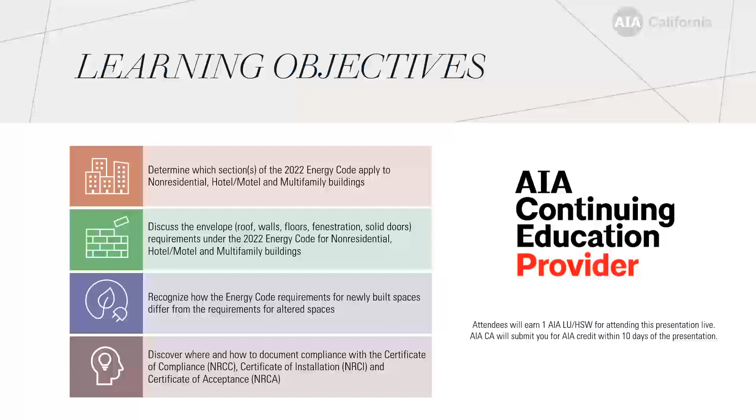Today's webinar, which will focus on requirements in California's 2022 Energy Code for non-residential, hotel, motel, and multifamily envelope features, is brought to you by Energy Code ACE. It qualifies for one HSW learning unit, and we will submit those units for you after you finish in full.

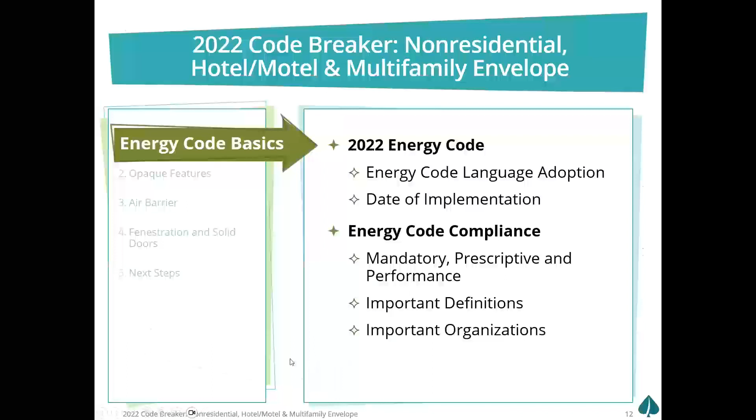Now, basics. I'm hoping all of you know we're in a 2022 building code cycle.

And this goes into effect for projects that apply for permit as of January 1st of this year. If you applied for permit last year, you're subject to the 2019 Energy Code. If you applied for permit as of January, the 2022 Energy Code. It's not based on when you're approved. It's not based on when you start construction. It's all about that application date.

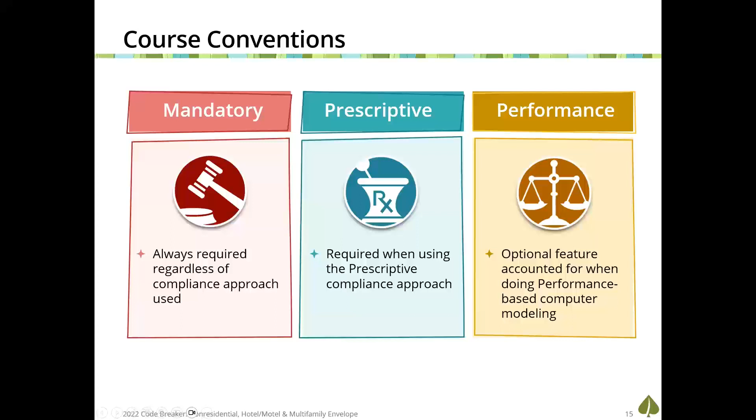Here at Energy Code ACE, we use these 3 symbols and color schemes throughout all of our resources and classes to help identify what is a mandatory requirement versus a prescriptive requirement, or a prescriptive compliance approach versus the performance compliance approach that can be utilized to show compliance.

Now, what are these mandatory measures? Mandatory measures are the first building block, and these are measures that were found to be cost effective for all scopes of work. And that's new construction, the least expensive time to integrate energy efficiency, additions and alterations. Alterations are the most expensive time to integrate energy efficiency measures.

And every energy code requirement, with the exception of indoor air quality, has to show compliance to a cost effectiveness evaluation, of which that particular building feature will pay for itself over its lifetime with energy savings for it to become an energy code requirement. Now, built on top of mandatory measures are our prescriptive measures, which is also a compliance approach.

Now, prescriptive measures are based on climate zone. It's based on scope of work. We might not have the same prescriptive requirements for all building types, for all scopes of work, for all climate zones. We need to really understand what is your project, where is your project, and what is the scope of your project.

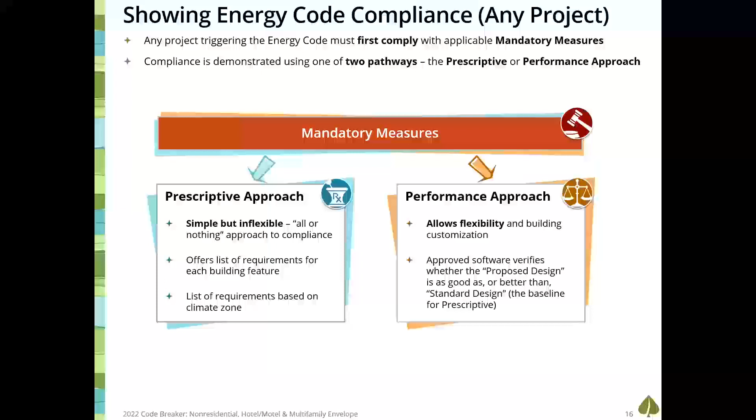You can use the performance approach to get flexibility of prescriptive measures only. Now, you can trade down to as bad as mandatory minimums, but you have to have equal energy savings that offsets that penalty to be able to have a compliance document that says building complies. Now, we're going to talk a little bit about the different ways we can show compliance for just the envelope.

Now, we have a new series of forms in this code cycle. We have our non-residential forms that start with NR that apply for non-residential buildings, hotel motel buildings and high-rise multifamily buildings. Those are high-rise buildings that are 4 habitable stories or more. LM is the brand new series of forms introduced in this code cycle, which stands for low-rise multifamily. So the LM forms would only be used for a multifamily building that's 3 habitable stories or less.

LM forms typically have to be registered with a HERS provider. Now, there are hiccups in that process right now, and the Energy Commission has put out a regulatory advisory indicating that right now we can't register these LM forms. And what they're saying is, when we can register LM forms, the design team is to register them, even if you're in the middle of construction. And we go back and make sure we have these registered documents so that the in-the-field documentation regarding testing and verification is linked up to the registered certificate of compliance form.

So right now we have forms that have a watermark saying cannot be used for compliance. This is not registered. We would have to support, hey, I can use these because of this regulatory advisory. And that is how I go about submitting for compliance to the building department. Now we have a question, are the LM forms in AutoCAD?

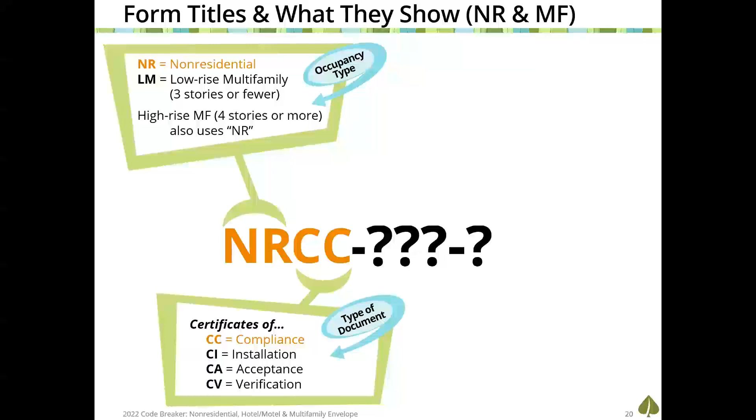Now, there are 2 methods that we can show compliance for the envelope. We can use state certified software via the performance approach. Currently, right now, there are 3 options for non-residential buildings. We have CBECC, which is the state provided software that is free. We have EnergyPro, which is a third party for sale product that also does prescriptive, also does single family, does a lot of things. It's a popular choice. There's also IESVE, which is really unique because it is a 3D modeling tool that can help support the performance approach. So there's choices, and we have to decide which pathway we're going at the beginning of a project.

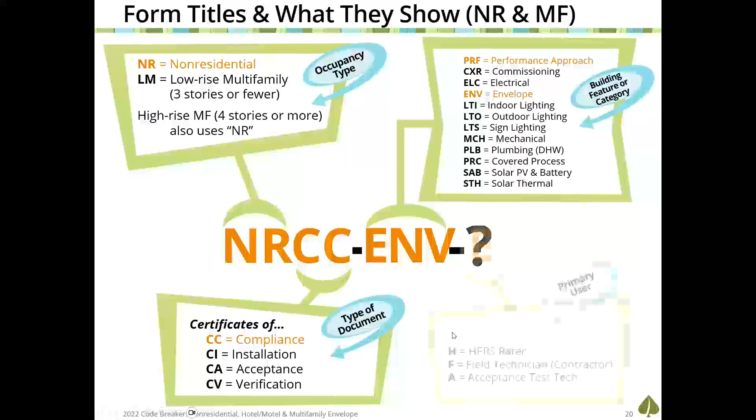Or we can use the prescriptive approach, which is documented with the NRCC ENV form for a high-rise multifamily, non-residential building or hotel motel building, but it would be an LMCC ENV form if it is a low-rise multifamily building. Now, there is a letter at the very end of all the compliance forms, and they help support who's responsible for enforcing the information within that document. E is the authority having jurisdiction, the enforcement agency, the building department. H would be the HERS rater, which is typically associated with the CV forms. F, field technician, that installing contractor, or A, acceptance test technician, which is a certified acceptance test technician for our acceptance testing.

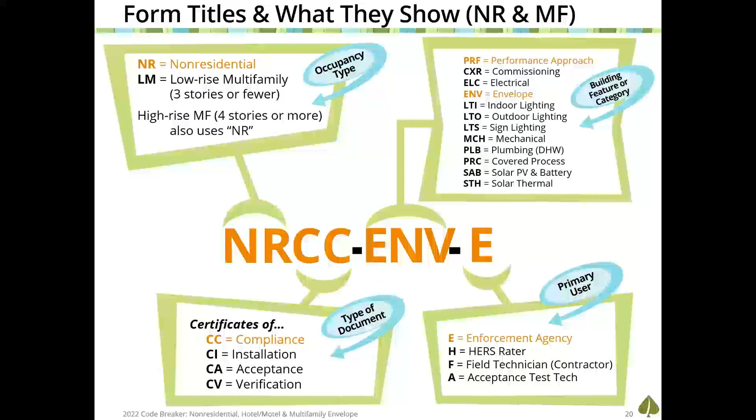Now, I think this is an important conversation for you guys to be aware of, because how are you making sure that the contracts and the requirements required of the contractors is fully being supported with your design documents, specifications, and work orders, so that everyone knows who's doing what, when they should be on site, and how to not be stuck at the end of the day not getting your occupancy permit because all of this process, testing and verification, has not been accomplished before you submit for final occupancy.

Now, the virtual compliance assistant is a free tool available through Energy Code Ace that will help support the certificate of compliance documents. It also has a new process that's been introduced brand new for this code cycle for the certificate of installation forms for the contractor, in which it pre-populates what was promised with the certificate of compliance. Why is that important? Well, the certificate of compliance forms can get overwhelming. How many of you guys go, oh my gosh, my project has 10 pages of sheets just to support the certificate of compliance form for the energy code, and I can't even read most of these? Well, the contractor gets overwhelmed also. The certificate of installation will just show that contractor's scope of work.

And I've been telling people, do this before you start engaging contractors. Do this to help support the bidding process. So like I, as an energy consultant, I am providing these installation forms that are bringing just that scope of work for whoever's doing the envelope, who's doing the windows, who's doing the mechanical systems. So they really know what they should be bidding on and what's expected of them. So it might be something you might want to consider as a design team to help support the contractor down the road. Let's stop talking about contractors now and let's start talking about design.

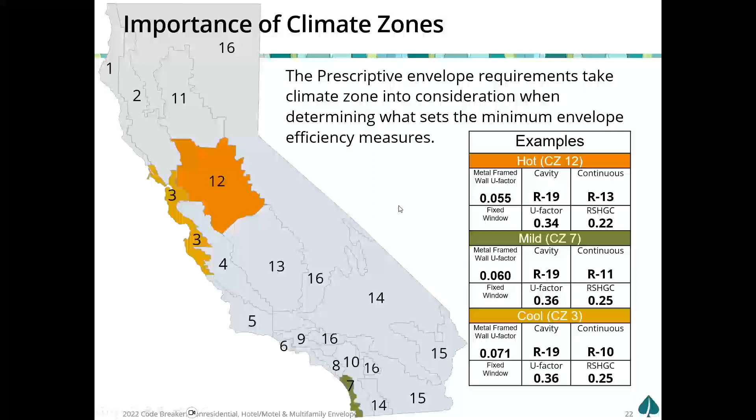And if you find you cannot meet these maximum U-factor requirements of your climate zone for your building type, well, that's when you have to start considering, should we be using the performance approach to get flexibility because of the design parameters and the scope of work that our building owner would like this building to entail.

There are some important definitions when we talk about the envelope, because the envelope requirements, with an exception associated with daylighting, in which we want to bring natural light into large volumes of spaces, whether they're conditioned or unconditioned, everything else in the energy code applies to conditioned spaces only. And I find a lot of people don't understand what is a conditioned space. Well, we look at the conditioned space as the definition in the energy code.

Now, the definition in the energy code of a directly conditioned space is a space that's being provided with wood heating or mechanical heating or cooling systems that exceed 10 BTU per square foot of heating energy, or 5 BTU per square foot of cooling energy. So sometimes I'll have a large warehouse and they're like, Gina, it's a large warehouse and they're packing some boxes over here in the corner. So we're going to do a little bit of spot heating, or it might be mats, it might be a unit heater. Is this warehouse conditioned?

And a lot of times I'll do the math and go, nope, you guys haven't exceeded the 10 BTU per square foot that defines this space as conditioned. So we do not have to meet the envelope requirements of the energy code for this warehouse. But the minute those mechanical systems do exceed these thresholds, that envelope in its entirety will have to meet the energy code requirements. Now, I want to point out the definition for newly conditioned space.

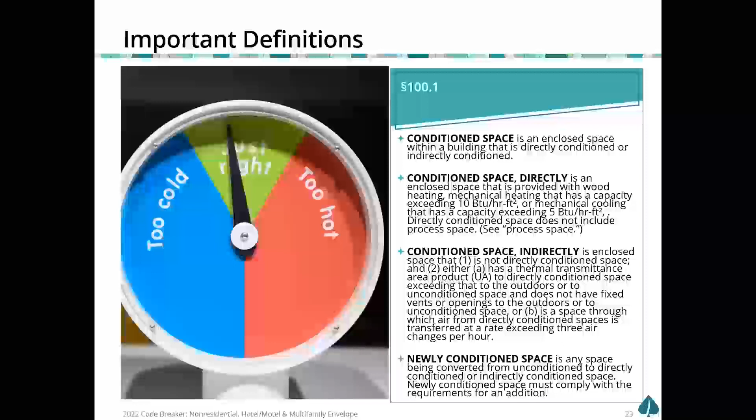It existed previously as an unconditioned space, but now we're converting it to conditioned space. And it is considered an addition by the energy code. And in addition, the envelope features, all of them, even though they were existing, will have to meet current code requirements to show compliance to the energy code.

Now we have exterior partitions and we have demising partitions. Exterior partitions are separating that enclosed space from the great outdoors. Whereas a demising partition, which is probably not the definition you think it is, because the energy code likes to do their very own definitions, a demising partition is separating an enclosed conditioned space from an enclosed unconditioned space. So think about an enclosed parking garage that is underneath an office building. That floor is now a demising partition because above the floor is conditioned office and below the floor is unconditioned garage.

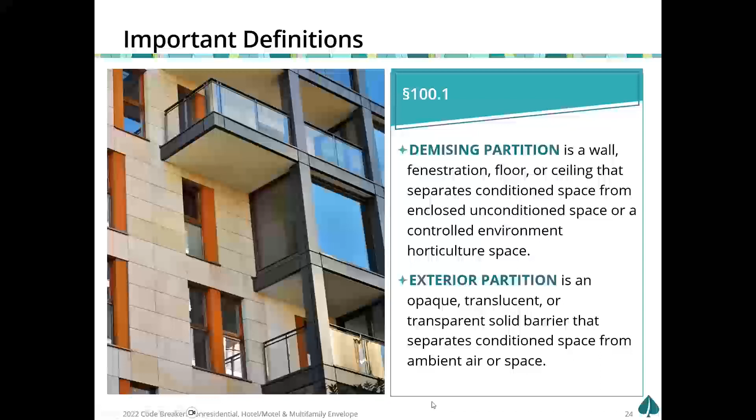Both of these partition types will have energy code requirements, but they'll differ because that demising partition is not subject to as much heat transfer as our exterior partition requirements. Hence, typically the requirements of the energy code are less stringent than they are for an exterior assembly.

Now we need to talk about scope of work. Is it new construction? Is it an addition, or what we like to call newly conditioned, which is considered an addition? Or is it an alteration, which has code requirements of the energy code? Or is it a repair? Repairs do not have energy code requirements, but repairs cannot increase the pre-existing energy consumption of that particular component, nor can it have alteration requirements of the energy code for it to be considered a repair.

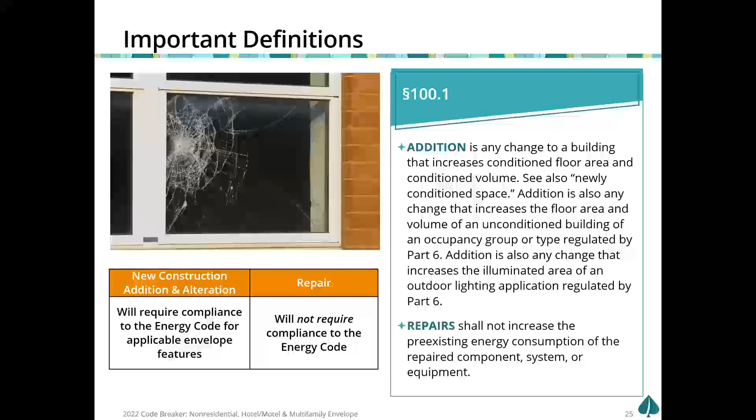And it's not easy to navigate the difference between repair and alteration, and I strongly recommend, if you don't have an energy consultant that you like to reach out to see, hey, did I trigger the energy code? You might want to send that question in to Energy Code Ace or to the CEC hotline to get a really good feel if your scope of work triggers the energy code.

Now, there are various organizations we need to be aware of when we're talking about the energy code, such as Cool Roof Rating Council. Oops, which is spelled wrong.

Cool Roof Rating Council certifies a cool roof roofing product, and we have cool roof requirements, or what we like to call rated roofing material requirements, for all new construction, additions, and for many alterations for most non-residential projects. We don't always for single family, but we do for non-residential.

The Department of Consumer Affairs certifies products as being insulation and radiant barriers. So sometimes I'll have a client going, Gina, we're going to be using DensShield on our walls, and then we have insulation between the framing. I have continuous rigid insulation because I'm using DensShield. Well, DensShield is not a rated insulation product by the Department of Consumer Affairs, hence cannot meet the requirements of continuous rigid insulation of the Energy Code because it's not certified as an insulation product.

Now, I find the certified list of rated insulation products can be elusively difficult to find. So I strongly recommend all of you grab this hyperlink that I have here and save it because it's not easy to find. And in there, you'll see there's an Excel sheet download that supports the current certified products. So you're going to have to keep coming back to see if any new products have been added over time.

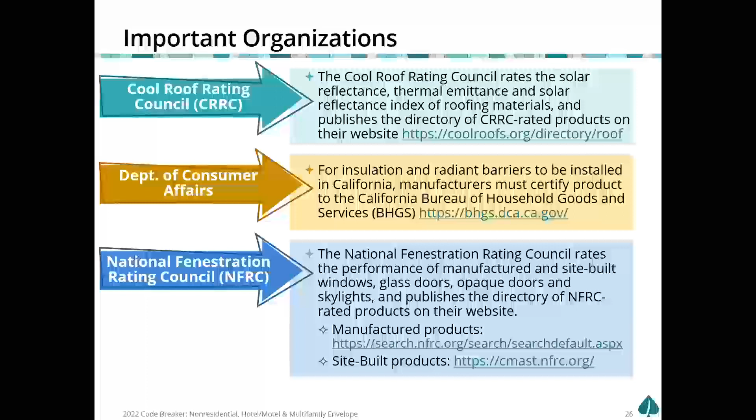National Fenestration Rating Council certifies the energy efficiency of window fenestration features, whether it's a window, a glass door, a skylight. And you'll see that there have been changes for this 2022 code cycle that's really pushing towards all window products being NFRC rated or certified. And there's very few exceptions to having to have an NFRC certification.

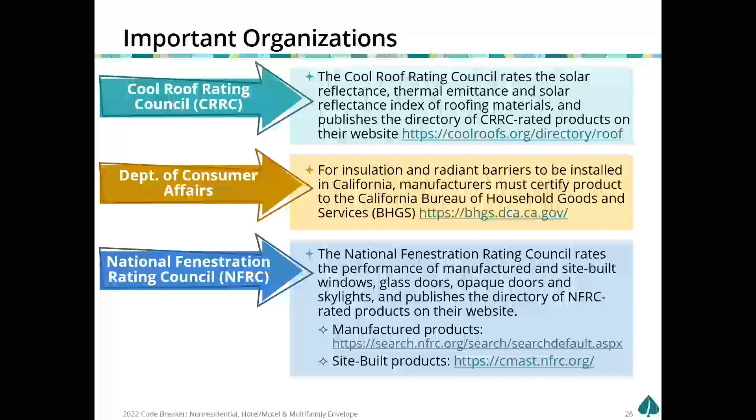I'm finding this is causing havoc out in the field where contractors are not up to speed on this. And we really need you, the architects, to be very clear in your specifications and your window schedules about what the certification requirements are associated with the window products of your projects.

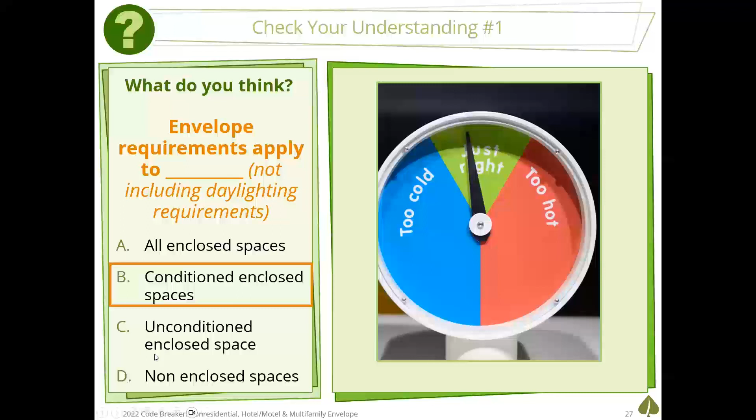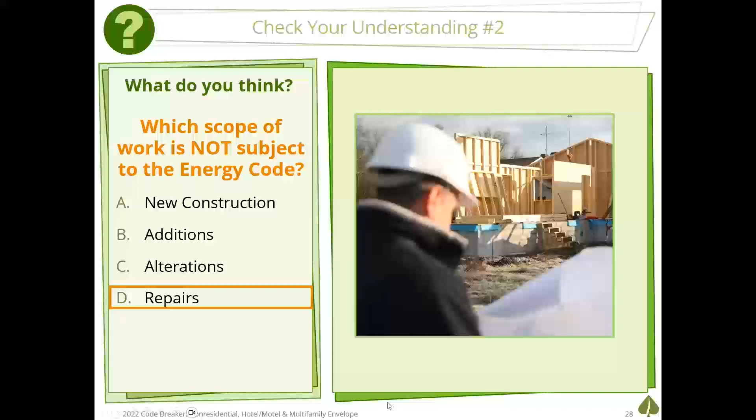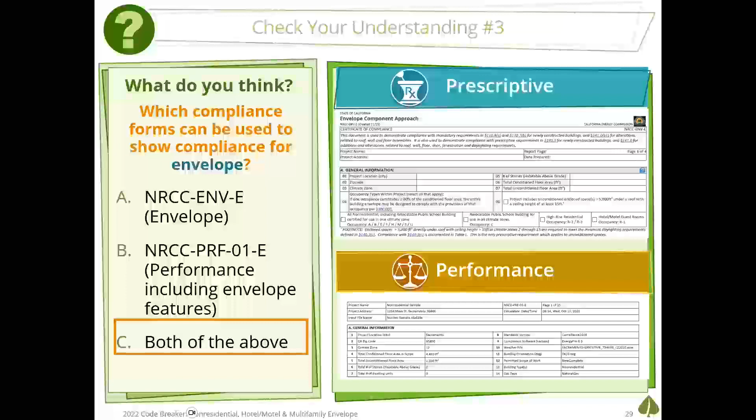If you need wiggle room for your envelope, you can use the performance approach for just the envelope. You can also add mechanical systems. You can also add electrical systems, PV, battery, etc., but you don't have to. What's great about non-residential hotel motel compliance currently is that you have that flexibility. Right now for multifamily, we don't currently have that flexibility, and I'm hoping that will change in our next couple versions of software.

Okay, let's talk about opaque features. These are features I cannot see through. Let's start with the roof. But before we get there, some important definitions. U factor versus R value. Now, the thing that's important here is that the R value is only something that's going to be utilized per the materials that are approved by the Energy Commission as materials that can build up that R value, knowing that insulation has to be insulation that's certified by the Department of Consumer Affairs.

Now, U factor is the inverse of R value, considering all of the assembly layers associated with each of our assemblies. Now, there are some restrictions there also per the Energy Code of what we can utilize that determines the U factor.

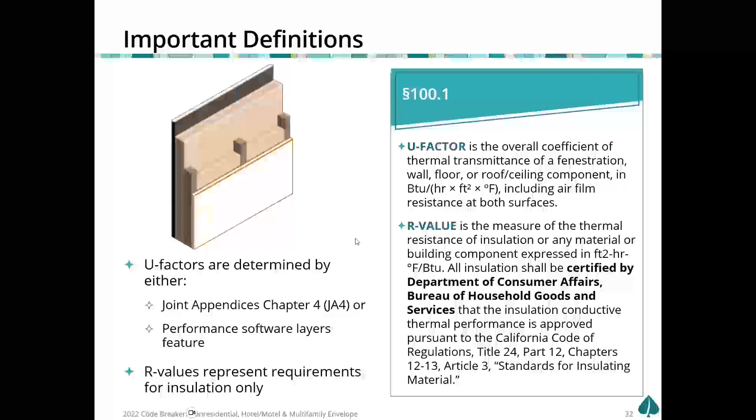When we talk non-residential, hotel, motel, and multifamily compliance, we are mostly going to be talking about U-factor, because we are going to be looking at what is your framing configuration, what are your layers of insulation, and where are those layers of insulation? What are other features that might be associated with your assembly, like it's a double wall assembly, or it's a staggered stud assembly, things I'm going to take into consideration that isn't all about just the R-value of the insulation products associated with the assembly.

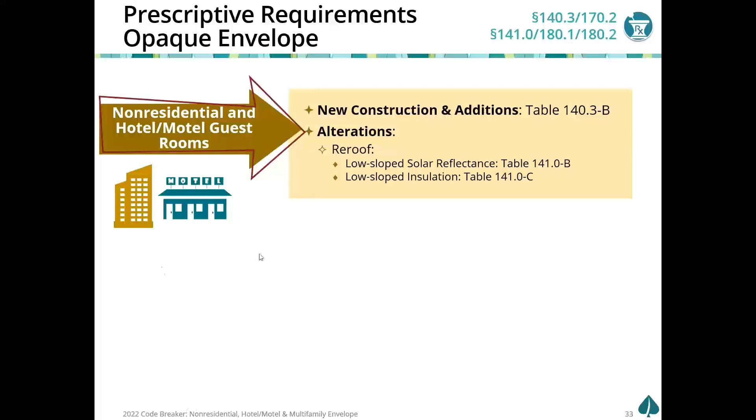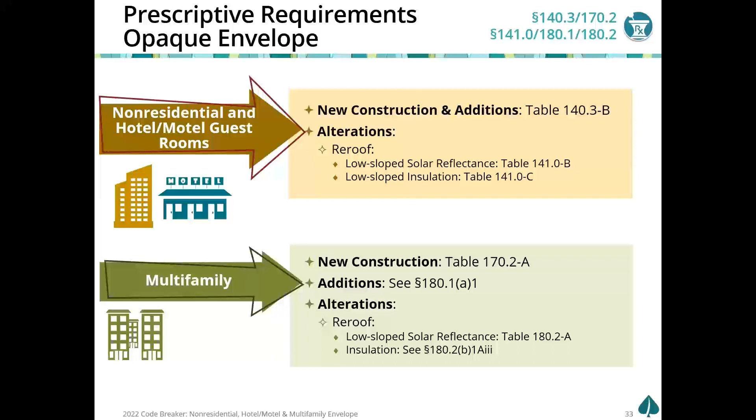Now, when I talk about non-residential and hotel motel guest rooms, I'm going to go into the code sections of the code book of subsection 140.3 specifically. Then there's another section that speaks to just the alteration rules associated for envelope, associated with our non-residential and hotel motel rooms. What is brand spanking new for this code cycle is that they created 3 new subchapters just for multifamily occupancies. And we would go to subchapter 170 for the new construction rules, and then we would go to the 180s for how the rules change for additions and alterations to multifamily buildings.

Let's start with the roof. I like to start at the top of the building and work my way down. Now, one of the things I want to tell you guys is that there are some aggressive alteration changes of the Energy Code associated with re-roofing in this 2022 code cycle. And it is throwing roofing contractors for a loop. So you might have to do more to support what's required of the contractor when we're talking about a project scope that includes anything to do with altering the roof.

Now, we need to understand some definitions when we talk about alterations to the roof. So here's this brand new fact sheet that we just came out with, and here it's providing to us some important definitions that we need to know about. And we need to know the definition of roof recoat versus roof recover versus roof replacement, because we're going to see that the requirements for the roof will change for a roof recoat versus what's going to be required for a roof recover and a roof replacement.

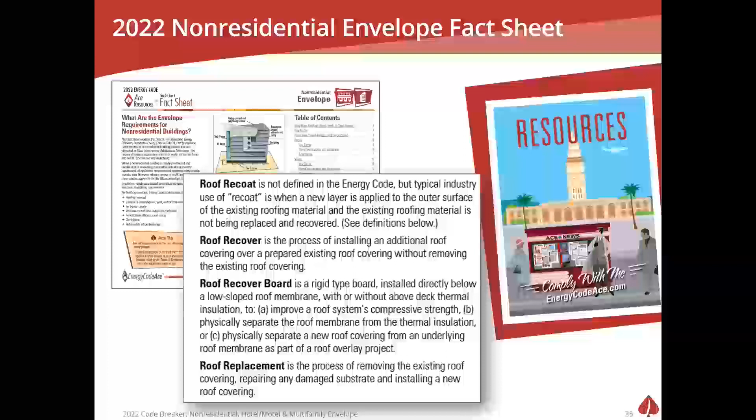I'm finding that almost everyone agrees with what the definition is for roof replacement, but there is a lot of stuff going on out there and people trying to determine scopes of work fitting into roof recoat versus roof recover. It's been so fun to be part of this process.

So let's talk about our cool roof requirements for new construction. So we need to know the slope of the roof. A low sloped roof, that's a roof that has a pitch of 2 in 12 or less. You will see that all non-residential buildings of all climate zones are going to have cool roof requirements. If it is a hotel motel building, you'll see that only the guest room area of that hotel motel building in some climate zones have cool roof requirements.

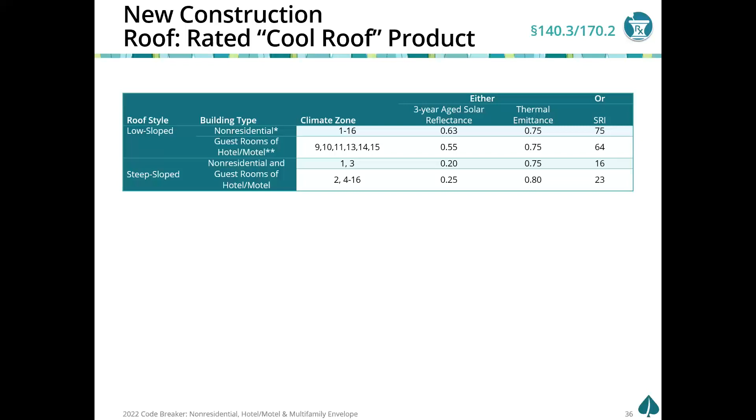Who's going to do cool roof over only parts of the building? That's never going to happen. This is one of those things that they're talking about changing for the 2025 code cycle by not defining hotel motel by just where the guest rooms are, but that entire occupancy. Now, the minute I have a steep sloped roof that's a pitch greater than 2 in 12, you'll see that both non-residential and guest rooms have the same requirements, which is very much dependent upon climate zone. Climate zone does determine whether you have to consider cool roof or not for a steep sloped project.

So I wanted to give you guys a feel of what does that 0.63 aged solar reflectance mean to me. So I went into the Cool Roof Rating Council database, and I love this database because I can sort by color. I can sort by product type. I can sort by aged solar reflectance. And I'm trying to hide the innocent here because we at Energy Code Ace cannot promote one product over another. But I want to show you that there's lots of choices.

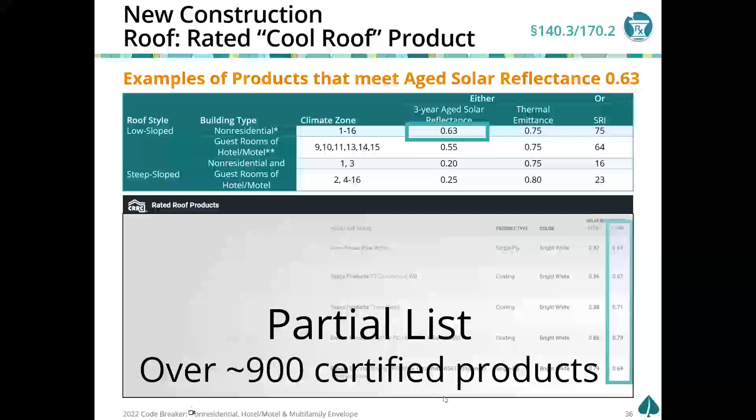And what I find is almost always you guys are already specifying a cool roof, even though you don't know it. And it's usually, if it's white, a pretty gosh darn good product. And in the performance approach, I can take advantage of what you wanted to use anyway, because it exceeds these values. So this seems like a small discussion, but it can make a big impact to your compliance margin in the performance approach. Now, there are some exceptions to cool roof, such as in certain climate zones.

If you're giving me a certain U factor, well, then you've already saved the planet, and I'm not going to make you have to do cool roof. If you have a heavyweight roof, such as an occupied roof, we're not going to make you have to do cool roof because the two don't really coincide with each other.

If the roof is an integrated PV panel, not a PV panel on top of the roof, but the roof itself, think Tesla roof systems, is the PV system, that PV system does not have to meet the cool roof requirements. And there is an ability to get trade-offs for the specific cool roof requirements by adding more insulation to the roof. Why might you want to go there?

Sometimes we have glare requirements in certain cities that if you're surrounded by buildings that are higher than your roof, we want to prevent the glare into those spaces. And so we don't want a bright white roof. Maybe we have to do a tan roof. You also might have requirements around airports or observatories that might talk about the glare requirements.

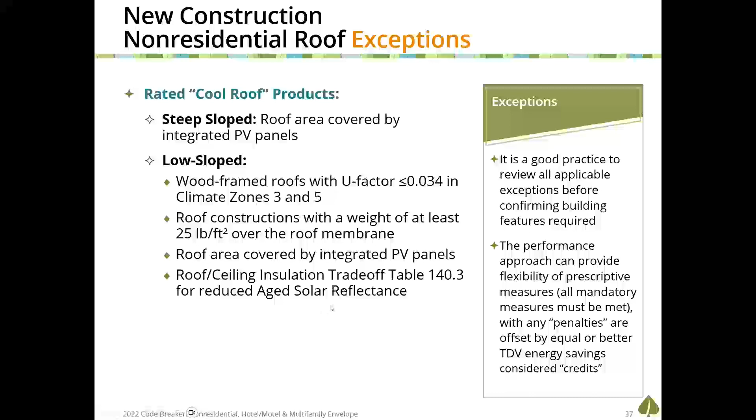I always like to say when it comes to exceptions, read them first. Start with the exceptions, see if you even have to read further about what the energy code requirements are to determine what your scope of work is going to have to do to support the energy code requirements.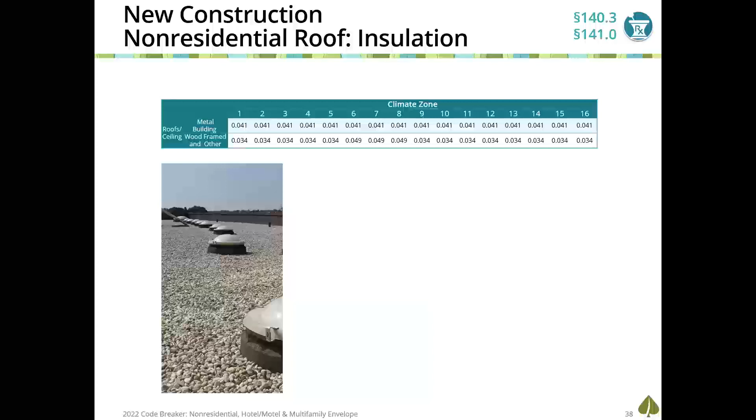Now, roof insulation is a thing, just like we have wall insulation and floor insulation. It does differ on building type. Here you'll see metal building. Metal building is a prefab metal building. It's metal panels. It's not the same as a metal framed building. If we have a metal framed building, a wood framed building, a SIPS building, I don't care, any other type of building, that's when we go to the wood framed and other.

And I just thought I'd give you guys an example of the most common U factor we see here for most climate zones at the 0.034. One example is I have 4 inches of concrete up there on my span deck, plus I'm going to have 5 inches of R5 polystyrene. If I want to use polyisocyanurate, I'm going to have maybe only 3.5 inches. If I don't have the concrete, well, then I might have to do more insulation because I don't have the mass. I have a wood framed roof. Well, this is going to then represent R38 or R30.

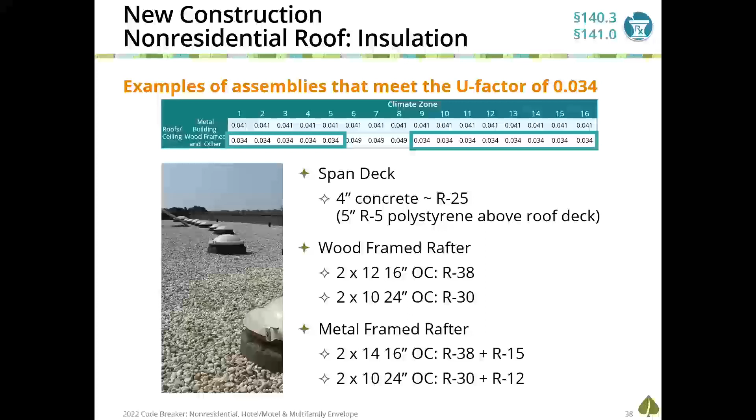But if I have a metal framed roof, now you're going to start seeing we have layers of insulation. I still want that R38, but I'm also going to have to provide continuous insulation that equals R15 in this example, or R12 if I'm using 2x10s, 24 inches on center. I don't have as much framing interruption, so I can go down in insulation to help to then still meet that overarching U factor of 0.034.

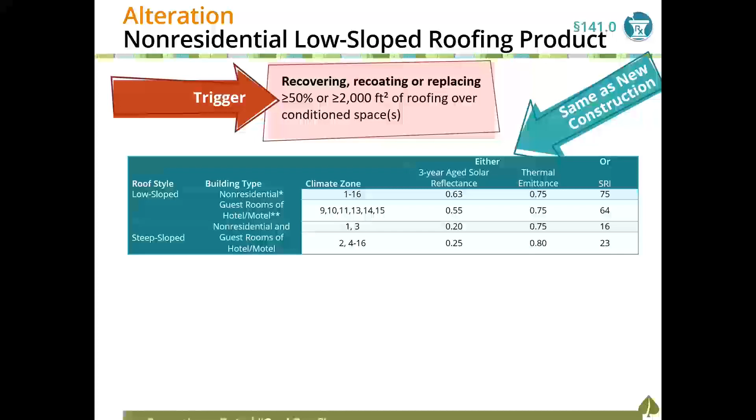Now, when we're talking about re-roofing, if you're re-roofing 50% or more of the roof, or 2,000 square feet or more, whichever comes first, and it's a recover, a recoat, or a replacement, you're going to trigger the same exact requirements we just talked about for new construction, and the same exact exceptions for alterations as we saw for new construction. What's different is regarding the roof insulation requirements. And I'm just concentrating on low sloped roofs or flat roofs right now.

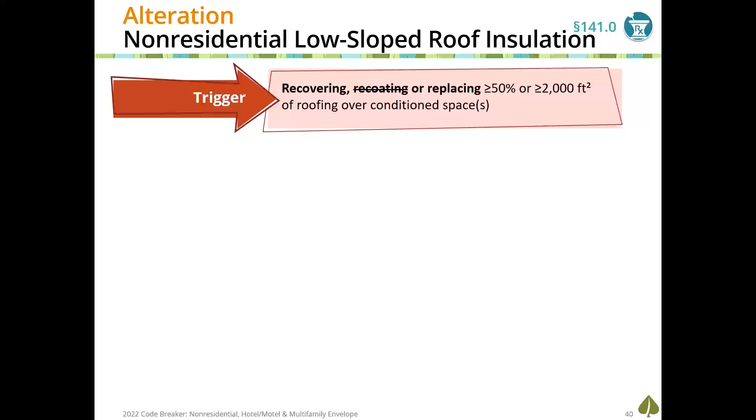If you recover or replace the roof 50% or more, 2,000 or more, whichever comes first, we have some new aggressive insulation requirements, which in most climate zones is going to be R23 continuous insulation. Now you do have a U factor, but they did say, hey, yeah, we'll let you think about the U factor and how much insulation might be below the roof deck. But we want at least R10 or more insulation to be added above the roof deck.

This is all about trying to deal with condensation issues, concerns, et cetera, in which having that insulation before we get into the warm area of the building, building science says, hey, insulate on the outside before going to the inside. And that's going to help prevent some of the moisture condensation concerns many people in the industry have when we talk about cool roof products.

Got to tell you, roofers are struggling with this, because what happens when you have parapets that have curbs that don't allow for an additional 2 inches of insulation? What happens for that threshold, for that entry from the exit of the stairs to the roof? What happens to the various pieces of mechanical equipment that are on there?

What happens to your PV systems that are on stanchions up there on the roof? How can we do all of this? Now, there are some exceptions, but they're not as much as people would love to have, such as if you're recovering and you add new R10 insulation, you do get some exceptions. If you're not lifting the mechanical equipment, you do have an exception, but there's no exceptions for the parapets. There's no exceptions for the PV panels. There's a lot of things we don't have exceptions to.

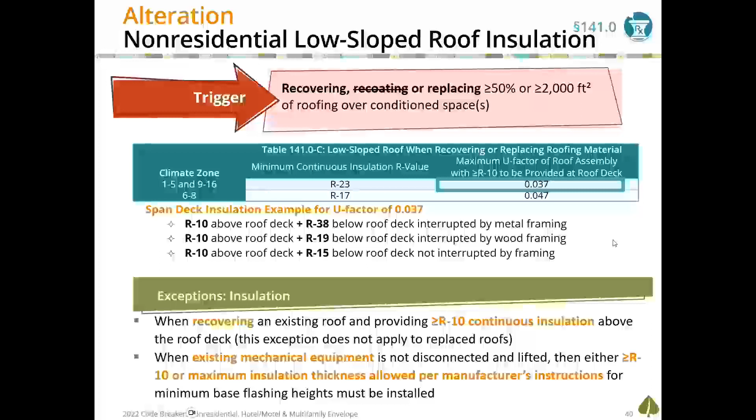Becky's asking, I want to confirm wood frame roofs do not require continuous insulation. That one example I gave you, Becky, would not require continuous insulation. I gave you one example of how we can meet the U factor. That is not representative of all assembly types. So that was an example only.

Example. I'm going to say that over and over again, because you're going to be like, Gina said, and we never want it to get back to Gina that someone said Gina said. It's happened.

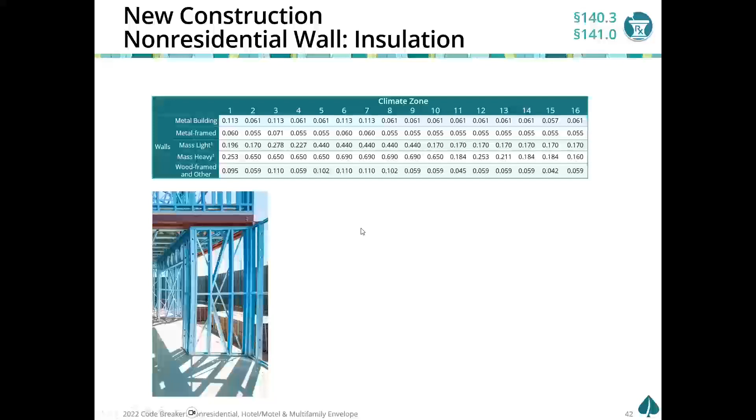Walls. Okay, so new construction based on climate zone and wall type. Here's that metal building again, our metal framed wall versus our light mass walls, our heavy mass walls. We have definitions that help us understand whether it's heavy mass or light mass. Wood framed and other, that's that category that everything else I didn't mention is going to go into. And let's take an example. I find most non-residential projects use metal framing, and we have a 0.055.

Here's some examples. Now you'll see here with metal framing for my walls, it's really not possible at all to get this U factor without having an additional layer of continuous insulation on the wall. It could be on the outside of the wall. It could be on the inside face of the wall. It can be within the wall because it's a staggered stud wall. It could be a SIPS, well, it wouldn't be SIPS because then it wouldn't be metal framed, but there's many ways you guys can go about doing this.

Now, let's talk a moment about Z-clips. Z-clips come in different flavors. You have metal Z-clips, you have fiberglass, you have isolated metal Z-clips. If it is a pure metal Z-clip and it is spaced 24 inches on center or closer, those Z-clips have to be modeled as metal framing interruption. And all of a sudden, all this work, expense, and everything we did to get this additional layer of continuous insulation is negated. So we really have to think about what are you using for Z-clips and what is the spacing and what does that do to your overall compliance for your wall assembly.

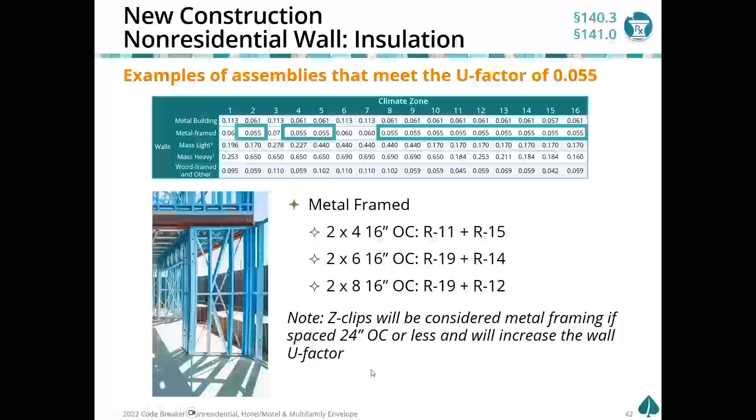Alterations for walls. So if you are making an existing wall accessible, you're taking the outside face off, you're taking the inside face off, I don't care, you're rebuilding a wall in the same exact location, that is an altered wall. And now you just have to meet the mandatory requirements of the energy code. Now I start talking R value. If you have a metal framed wall, fill it with R13, walk away, call it done. If you have a wood framed wall, fill it with R11, walk away, call it done.

Now, if it's a demising wall, that's when we have to start talking, because demising walls, if they're metal framed, remember that demising wall is separating enclosed unconditioned from enclosed conditioned. Metal framed has a U factor of 0.151. You cannot get 0.151 with a 4-inch metal wall, a 6-inch metal wall, with just R11, R13, R19, R21. You can't get the 0.151 unless you also have either continuous insulation or it's a fire rated wall in which you have 2 layers of 5/8 gyp on both sides of the wall. So there's a lot of discussion that has to happen regarding what's happening to demising walls.

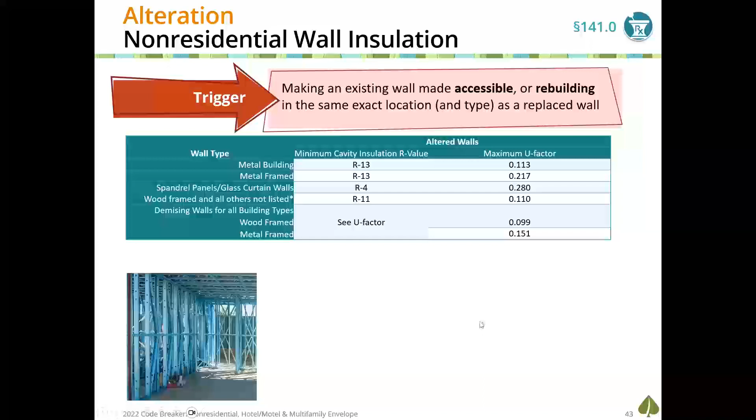And I forgot I had that fun little information on that slide. So I have a question for you guys. An alteration trigger for complying to the roofing requirements is going to include which scope of work? Which of these or all of the above is going to trigger cool roof requirements for all climate zones for non-residential buildings, for low sloped roofs? Excellent, everyone. That is D, all of the above.

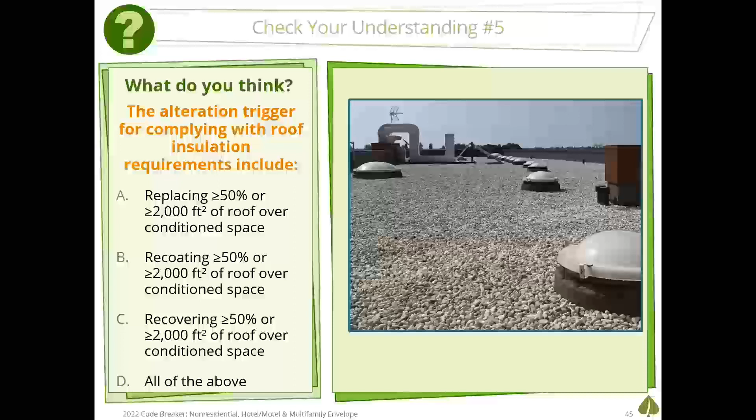Excellent. Now, what is the trigger for low sloped roofs when we talk about having to insulate that altered roof? What is the trigger for having to insulate that altered roof?

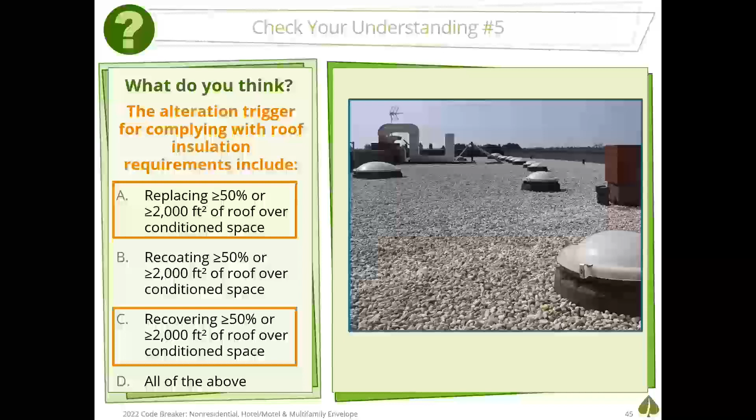With me saying D is not the right answer. A is right, and I want you guys to give me one more letter. A and what else is a trigger for the insulation requirements of this energy code? Excellent, everyone. That's going to be A and C. Recoat does not have to meet these requirements, which is why everyone right now wants to call their re-roof project a recoat. And they're almost always wrong.

Let's talk about some of the new air barrier requirements of the energy code. And you'll see I still have fenestration to talk about, which is a beefy topic. And now you know why I'm talking so fast. I'm hoping you guys are getting this. I know you guys want the handout, and I'm hoping you'll take our non-residential architect class, in which we talk a lot slower and we do exercises to apply these code requirements. Gina can talk slower. Air barrier.

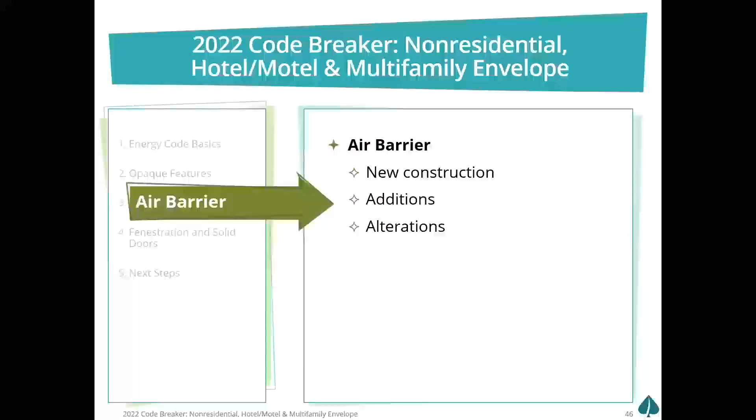Now, we had air barrier requirements in the 2019 code, but only for new construction and only for certain climate zones. And it was very limited in terms of what was required. They beefed it up in this code cycle, and it needs you, the architect. This is going to be required for all non-residential buildings in all climate zones, and for hotel motel buildings, except for climate zone 7. So non-residential, multifamily, multifamily does not have any air barrier requirements. Non-residential in all climate zones, hotel motel, all climate zones except for climate zone 7.

The design documents, there's new requirements for you guys. The design documents have to include the air barrier boundary, which is the conditioned envelope. So if I have a mix of unconditioned spaces, and there's kind of what I like to call innies and outies going on, you need to help define where is the air barrier. And now that we've defined the air barrier, we need to make sure that all your interconnections and penetrations support the air barrier. What is the air barrier? Where is it? How are we caulking and sealing for windows and penetrations and transitions and interconnected walls, et cetera, to maintain a continuous air barrier?

And then you're to provide the total square footage of all sides of the air barrier within the design documents. Now, they didn't give you any guidance on what this associated square footage looks like. So we're in a whole new world here. What does that look like? What are examples of that? Currently, Energy Code ACE is working with AIA to help produce some standard details that help support some of these requirements that we're talking about. So I'm hoping you'll look forward to that on our Energy Code ACE website with what's being done in conjunction with AIA.

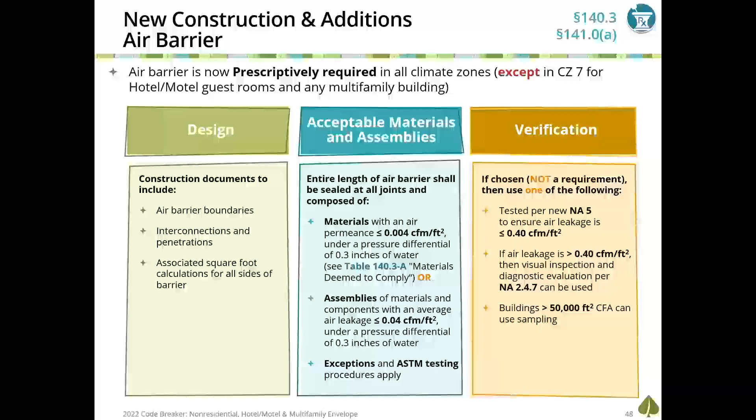Chipboard and plywood of certain thicknesses, not all chipboard, not all plywood. I think it's 1/2-inch plywood. I'd have to go to the table to get exactly what the thicknesses are. But yes, chipboard and plywood are on that approved list as an air barrier product, dependent upon depth of the product. You can volunteer to have that blower door testing because you want to. I have yet to have anyone want to do that, but it's a choice.

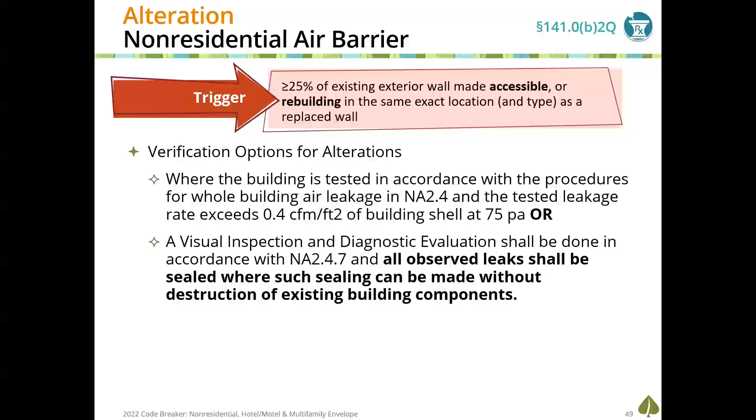Now, alterations to our non-residential buildings and our hotel motel buildings, except for climate zone 7, we have new air barrier requirements. If 25% or more of the exterior walls are being made accessible, or you're rebuilding in the same exact spot, then we're going to do our blower door testing. We're going to do some things. We are going to make sure you're using that air barrier product. There's things we have to consider for alterations to existing buildings to maintain the air barrier, the trigger being 25% or more of the exterior wall square footage is being made accessible or being rebuilt.

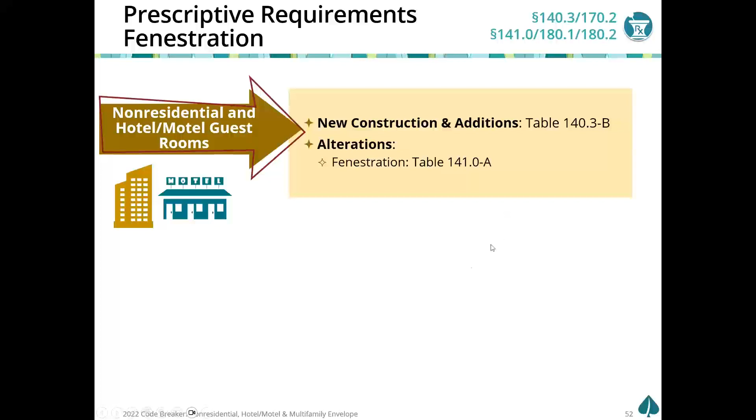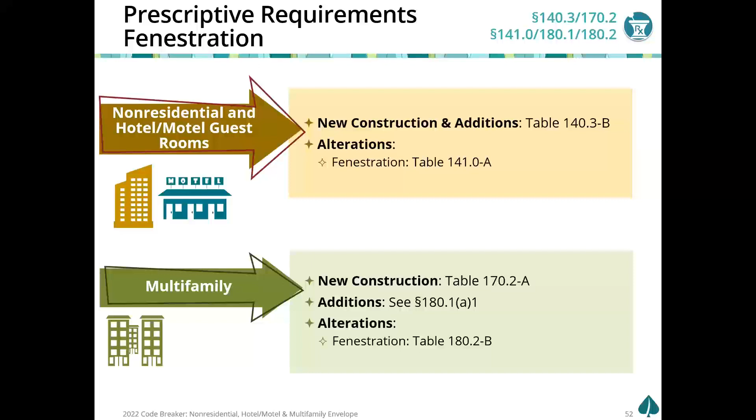Fenestration and solid doors. Okay, I have 13 minutes. So we'll see that non-residential and hotel motel buildings are still in section 140.3, and for alterations section 141. But for multifamily, remember, we have whole new chapters. We're going to go to 170 for fenestration also, along with our opaque assemblies, and the 180 sections for additions and alterations.

We have 3 different definitions of fenestration products. We have manufactured products, we have site-built products, and we have field fabricated products. Manufactured products are products that are available to everyone from a manufacturer. You can go to Home Depot and buy them, right? They weren't made special for your design at that site location. When it is a manufactured product, it is to be NFRC rated, or you can use default values.

Now, I got to tell you, default values cannot be used in the prescriptive approach. Default values represent the worst window known to mankind. And it's really difficult to show compliance in the performance calculation if you have a lot of default windows. We can almost always get it to work when we have maybe a fire rated assembly, some certain doors that have glazing within the door, certain features. But the minute we start having over a certain amount of default windows, compliance is very, very difficult to achieve.

So it means you guys really need to be up to speed on what products are NFRC rated when you're doing manufactured products, which is typically our punched windows. Site-built products are more common for custom skylights, and storefront or curtain wall are typically site-built, in which you're designing what that's going to look like, that's going to be manufactured at a manufacturing plant just for your location.

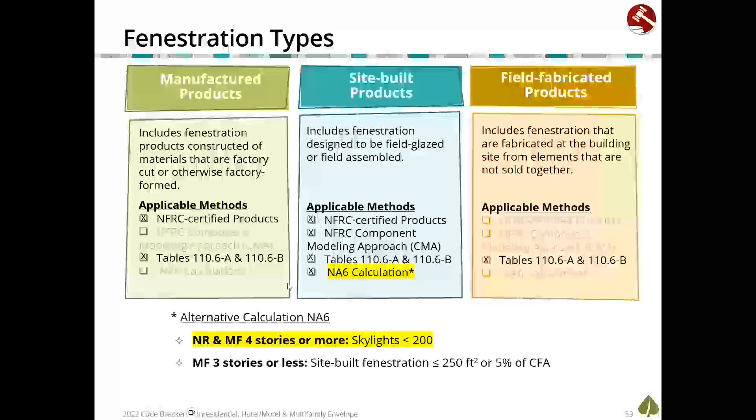Okay, so field fabricated products are when I'm slapping things together out in the field. I get all the products from my Home Depot, and it might be a storefront wood stop window. It might be a stained glass window. It might be a glass block window. I can only use default values for field fabricated products, which is very, very difficult, as I've said, to show compliance in the performance approach. And there's no way to use default values except for a little teeny bit in the prescriptive approach.

What are these efficiency values that are such a big deal about the testing, Gina? Well, we have U-factor, we have solar heat gain coefficient, and we have visible transmittance. U-factor is all about preventing heat transfer, and the lower the U-factor, the better the product is performing. Solar heat gain coefficient is about how that glass product is preventing heat gain when the sun is hitting that window. This can be done with a tint, which we don't love actually in the Energy Code world.

It could be done with a coating, and typically we've really gone to low emissivity coating, and it used to be low-E, then low-E squared, then low-E triple. And now we're up to low-E quadruple. And we keep adding layers of low emissivity film or coating to be able to meet some of these solar heat gain coefficient requirements of the Energy Code.

Because we also have visible transmittance, how much natural light is making its way through that glass product to help light the space so that we don't have to turn on electric lights. You know, we want to save electricity, right? That's part of our major purpose of the energy code. The higher the visible transmittance, the better the product. So U-factor, the lower the better. Solar heat gain coefficient, the lower the better. Visible transmittance, the higher the better.

And I find most times I can meet the U-factor and solar heat gain coefficient, but because of the many layers of the low emissivity film, or because I might be doing it in a less expensive fashion with tint, I am not able to show compliance to the visible transmittance. And it's a double whammy because now you're increasing lighting energy, and by increasing lighting energy, you're increasing cooling energy. And it can be very difficult to get flexibility to the visible transmittance requirements of this energy code.

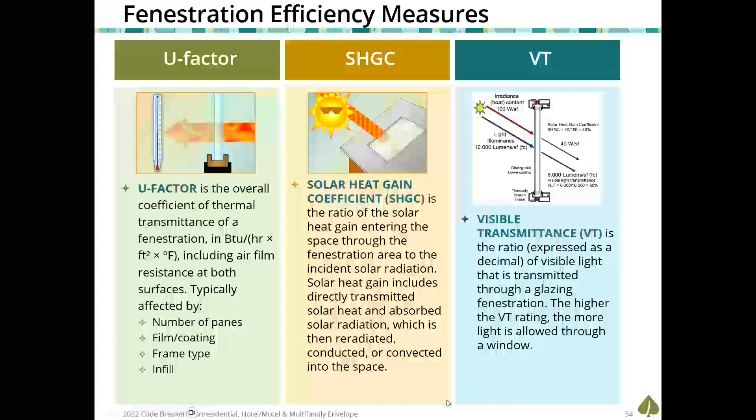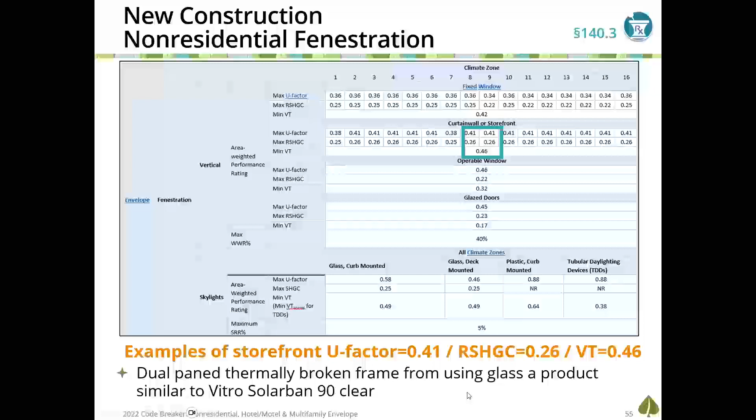Let's talk about architectural windows before we dive into multifamily. Architectural windows is a rating that is put out by North American Fenestration Standard/Specification that has been adopted in California for multifamily construction only at this time. Now, this is where I have structural loads on the building in which I need to have a window that has the structural integrity to be able to sustain the structural load. Most times it's wind load.

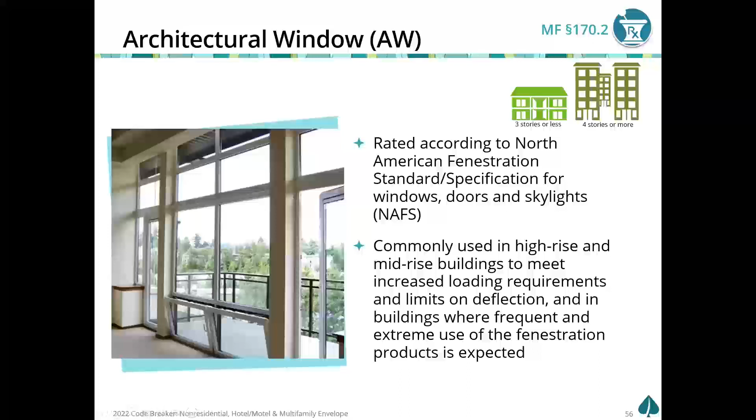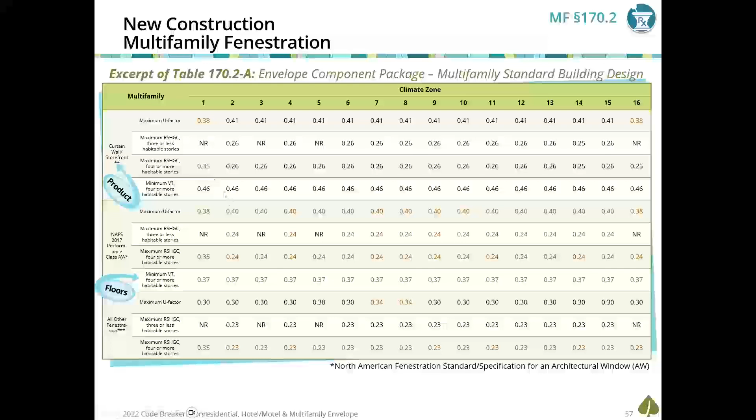Fenestration area is also very unique to multifamily in this code cycle. For non-residential buildings, hotel motel buildings, we saw that the window to wall ratio was 40%. For multifamily buildings, we're also going to have to show compliance to the maximum window to floor ratio of 20%. So I get 20% of my conditioned floor area as fenestration area, whether that be window or skylight or doors. And I have to show compliance to the 40% window to wall ratio for my vertical fenestration.

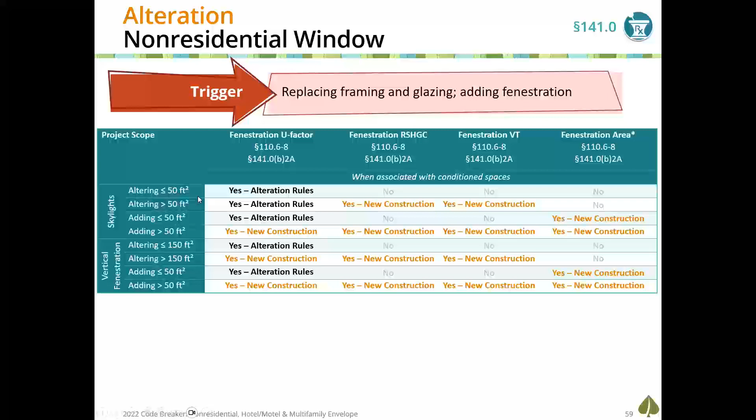Alterations: the rules will change based on how much is being altered and or how much is being added. There is flexibility being provided if you're altering under a certain amount or adding under a certain amount, that, hey, we get it. Most of the building is probably a product that was allowed under the energy code a few code cycles ago, and it's going to look different than what's required in this code cycle. So they give you some leniency. But the minute you start altering or adding over a certain amount of glass, you're going to have to meet the same exact requirements as new construction.

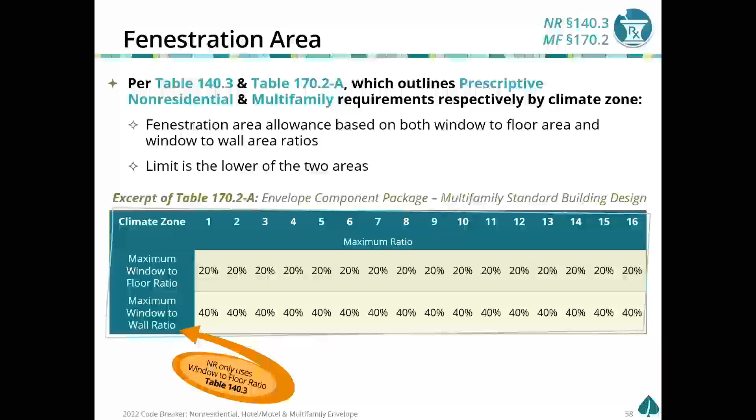Robert is asking, is the window to wall ratio overall total building or per wall? Excellent question, Robert. So the window to wall ratio is 40% of your north, south, and east elevations combined, and then 40% of your west elevation all by itself. Fun, right? So elevation matters, west all by itself, all the rest combined to get that 40% window to wall ratio or less.

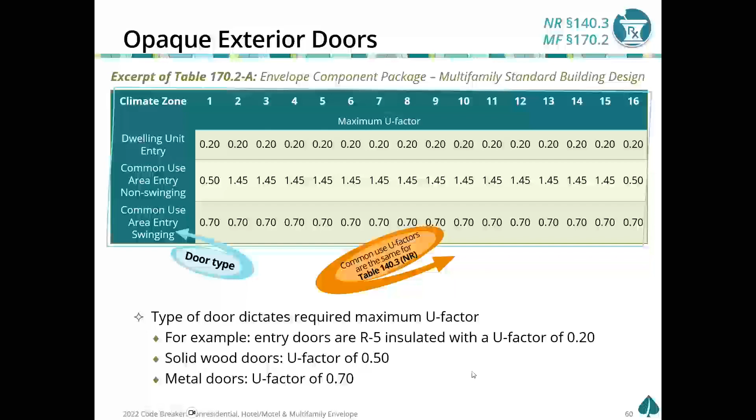We have opaque door requirements. A lot of people are surprised by this. These aren't new. These, especially for dwelling unit entry or common use doors, which does apply for non-residential also, pretty much represent an insulated door. Now, this can be difficult. So I find that not everyone is aware of that.